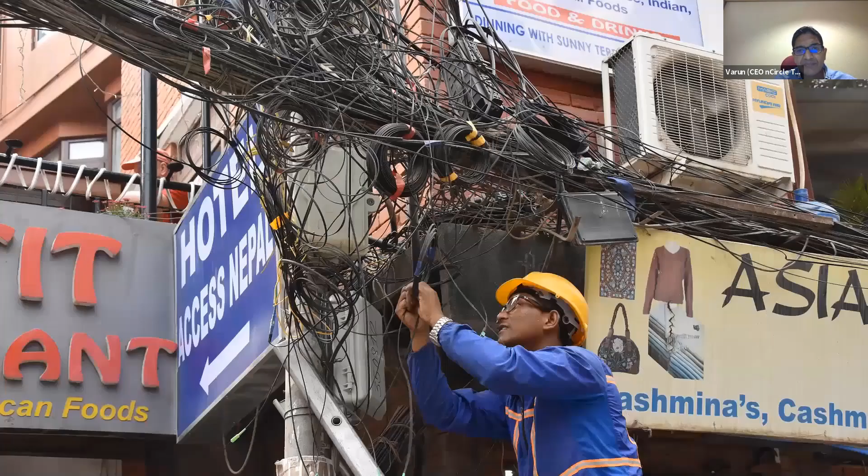The last is probably that you sometimes try to add new features into a very complex or non-maintainable system. After a few years, we may see many systems where teams look like this, trying to add one additional feature into an already overloaded system. So you need to choose the technology that already supports many features that you need, and you really need to keep the system very, very clean for future development.

So if there are all these problems, what is the best practice to evaluate and adopt the 3D technology in the right way? Next slide, please. Let's look at some best practices. And the first, as Simon Sinek said, start with why.

Define why are we building the 3D application and how are users going to use it. I categorize the purpose in the following few buckets. Basic, a viewer primarily focused on viewer technology. It could be a basic viewer or an advanced viewer.

Second bucket is review and very data-heavy operations. Third one is about configurators of various kinds. And fourth is probably editors. We'll be talking about each of them in detail in coming slides.

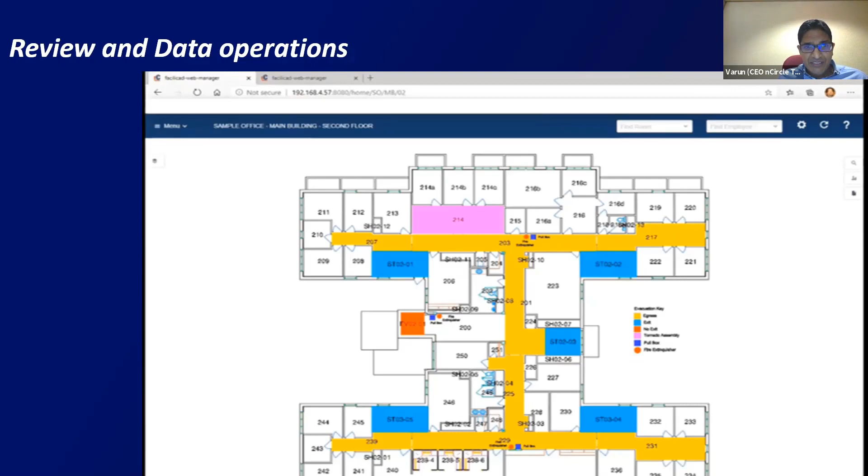So let's look at what are the important characteristics of such platforms. These platforms do not need to edit the geometry, but they do a lot with the 3D models. For example, users want to do measurements of various kinds, overlay data from sensors or facility management data, create RFIs linked to specific entities, comment history associated with the components. High accuracy of data is required because a lot of engineering decisions are being made based on the collaboration on the cloud platform.

Input output format can be regulated in some cases. In some cases, users might push you to support many file formats. If you are driving the process in-house, you do have some control on regulating the process, the formats.

Since such platforms are focused on specific workflows, a very high quality 3D visualization may not be critical. The only exception to that is if you are focused on C-level executives and review by C-level executives; real-time rendering with high quality can provide a lot of benefits. We've seen some examples of this kind of thing being developed, probably like Unity Reflect or so.

Business model wise, the most preferred business model for users is per user pricing with no limit on number of files. And this could be one of the very important factors in 3D technology selection in such cases. We'll come to the details of that in a few slides below. One last point to cover here is that security of the data is also very critical in such cases, because large organizations are putting their very confidential data on the cloud.

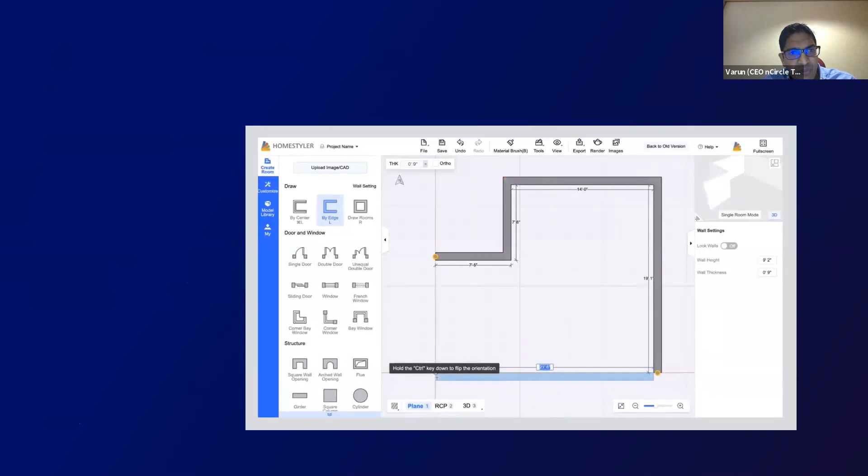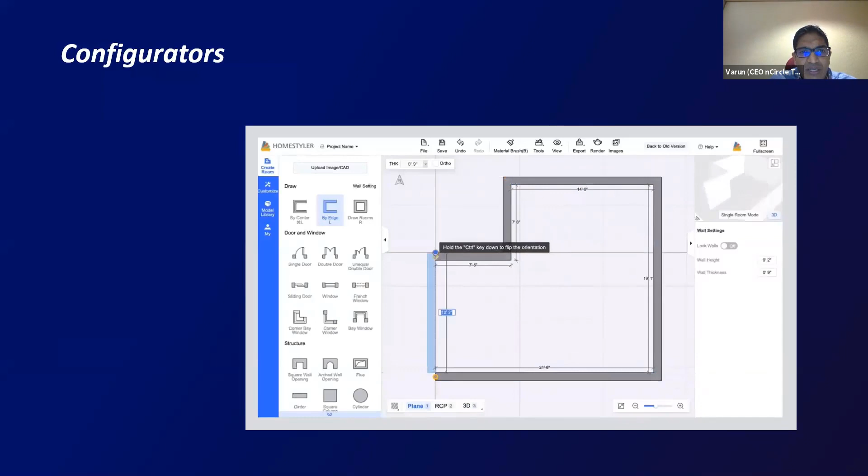Next category of viewers is configurators. As you can see from the image, a basic example is a home design and interior layout configurator. You could have a tile configurator, floor plan layout configurator, BIM objects configurator, basically configurators of various kinds. What are some typical characteristics of such platforms? These platforms need to provide users with lots of templates and then allow users to customize various parameters of the design. It needs to update geometry and visualization quickly.

Customization parameters could be only visual parameters or even geometry parameters as well. And when considering geometry editing, we need to evaluate if the editing of the geometry is better in a 2D environment or more efficient in a 3D environment. For example, if you're building a home configurator, editing the layout in 2D is convenient, and finally a 3D visualization is required for better experience.

Visual quality, I believe, is important if it is end user centric. For example, if you're focused on home layout and furniture, good quality visualization will definitely increase the chances of purchase. For some other components, the visual quality could be secondary.

So finally, one more aspect to cover here is that after the design is complete, we need to evaluate how the design will flow downstream, and hence the output format is critical. So in the example we've been discussing, after the user has configured something, you may want to output it into an industry standard format like IFC. So your output needs to be supported. The 3D viewer technology should support such formats downstream.

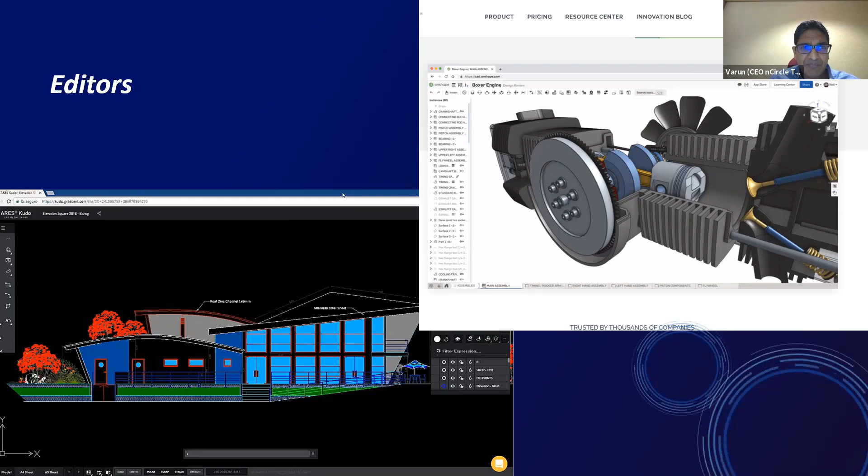And the last interesting category of viewers is editors. I mean, the 3D technologies are editors of different kinds. Plant process design, you could want to edit properties of files online, or even direct editing of layouts in the cloud. Here are some examples I think a lot of you know about: OnShape, there is Kudo, and a few others. So let's look at typical characteristics of some of them.

Since everyone is working remotely, these platforms provide capability to create and edit files online. A lot of you must have heard about OnShape. You can practically do everything that you can do in desktop CAD. ARES Kudo and AutoCAD Web offer you capability to edit DWG files online. Such engines do need to have a very good geometry kernel running in the background. People need to be able to work with many controls and commands to do things on the cloud similar to what they do on desktop applications.

Typically, some of them do need to support input output in specific formats so that when people complete their designs in the cloud, other collaborators can still work with the design in traditional desktop applications. Some of these platforms can even add a lot of value with co-editing like Google Docs. Multiple people can work on the same design simultaneously. Visualization quality is not of the highest importance for such platforms, but it is one of the good features to have.

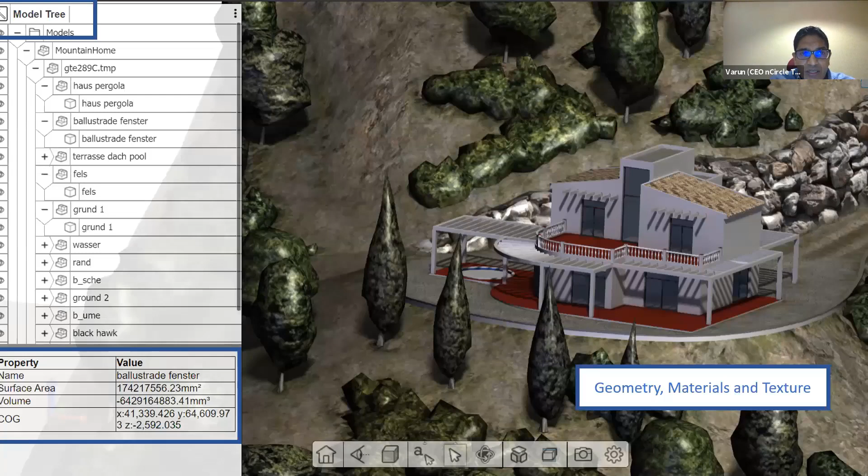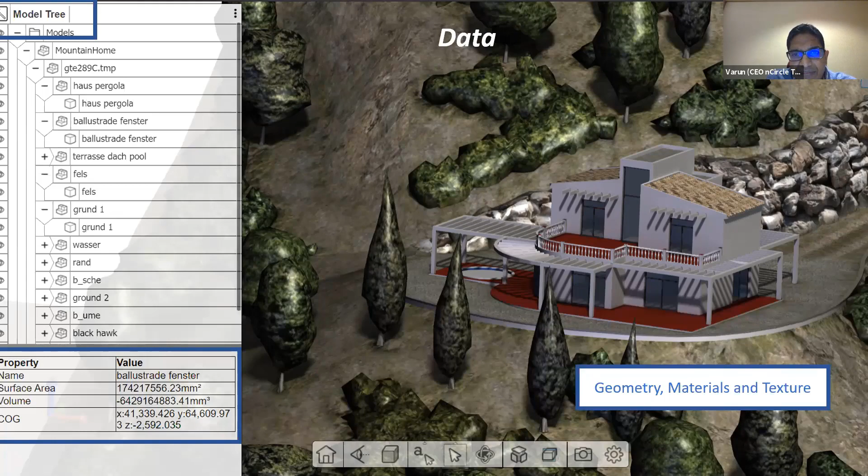So now that we have looked at different buckets and types of viewers, let's look at some of the parameters that we have identified for each of them in depth. So the first one is about data: data about model tree, geometry, properties of elements, materials, and textures. But to understand which 3D technology is best at providing accurate data, you need to understand what is the conversion technology behind. Let me start with the pipeline first.

Let's look at how the entire 3D viewing in the browser is happening and the pipeline. You have native file formats and you have a converter. Some of these companies provide you the converter on prem, or sometimes they are hosted on their own servers. And then once this native file format is passed through the converter, it creates a browser viewable file format.

And finally, these files are loaded in 3D viewer. This conversion of file format to browser viewable file format does not guarantee 100% data conversion, although most of them do a good job at it. Each of the different file formats has a different converter: IFC converter, Revit converters, and so on. The details we need to understand is that each converter is at a different stage of maturity and accuracy. The fine print in most cases is also if it is completely supported or partially supported.

Most of them support geometry, but you need to ask if it supports tessellated geometry, parametric or BREP geometry or not. Does the viewable format capture parametric information and entities? Are the materials supported? Some do, some do not. So like this, there are many things to evaluate from the adoption standpoint: geometry, metadata, model trees, even views, colors, textures, properties of elements, and probably even GUID, so that you can work a lot with such information.

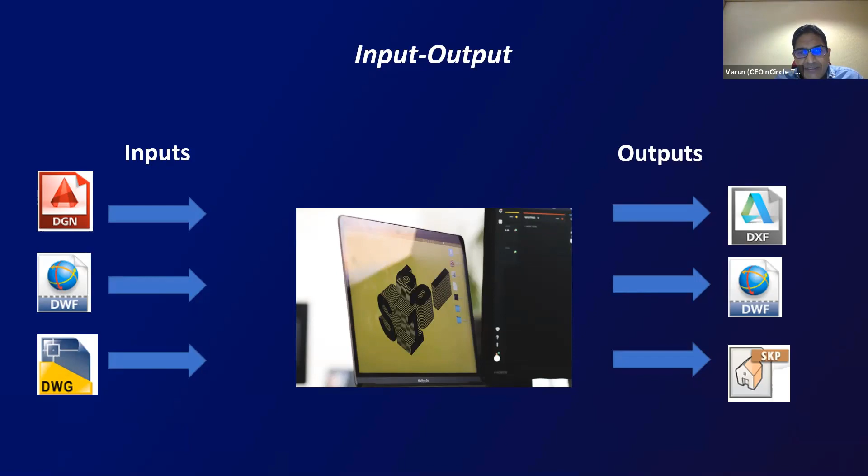You should also check how much would be the time lag when a new version of the file format is released. How long does it take for the conversion technology provider to catch up with the new file format? For example, if you're using Autodesk technologies, then Autodesk Revit file formats and the latest version might get supported faster as compared to few others. So all these affect your choice of technology selection at every point of time. The next that we talk about is performance.

Performance is very difficult to estimate at the start. However, one thing that I would like to mention is that many companies develop a 3D viewer on top of plain WebGL open source components, but then spend a lot of time to improve the performance. This happens mainly with in-house developed viewers.

In the long run, if you compare the cost of such development with the cost of licensing a technology and the opportunity cost of getting to market faster or later, you will realize that you are better off licensing a technology rather than building one your own.

There are few successful implementations when you start in-house, when the 3D viewers are not dealing with large files; they're more focused on configurators, because you can control the configurations and pre-estimate the configuration parameters required. So in such cases, maybe working with such technologies could be a good choice.

There are various kinds of performance optimization that need to be built to make it a high performance 3D viewer: progressive loading, geometry buffering, different kinds of clipping. When you pay a good license fee, effectively you are paying for such features which are developed and stabilized over a long period of time.

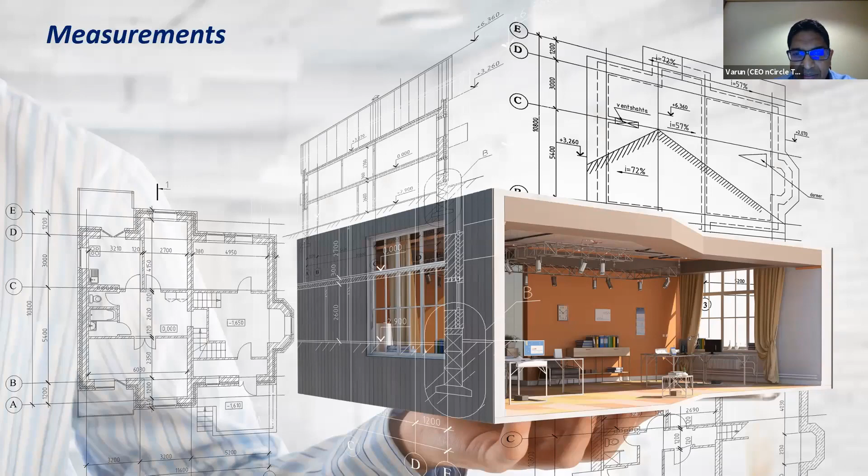The next one that I want to talk about is related to measurements. If you're going to do any measurements, accuracy of measurements is very important. It is important to check if the viewer loads measurable entities like edges, segments, points, and vertices apart from the tessellated geometry. This helps you in snapping of points closer to the entities and making accurate measurements. Measurements are not accurate on tessellated geometry, but could be much more accurate on measurable entities.

Next one is about visualization. If visualization quality is of prime importance, apart from out-of-the-box support for various visualization settings, it is important to check if the 3D technology provides you access to shaders or not.

To get some of these great visualizations, you may need to overload with a lot of shaders. And if you do not have access to be able to implement your own shaders, it could become difficult to get better visualization.

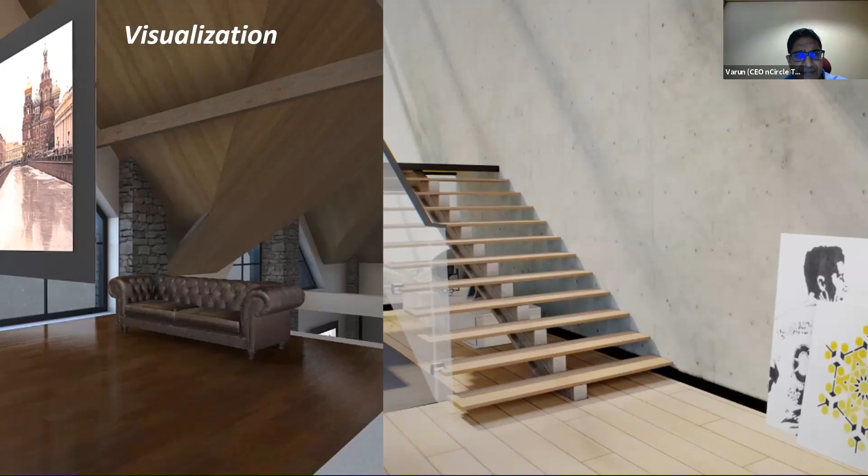Next one we want to talk about is security. For any cloud application, basic security checks are absolutely necessary, and you should prepare your system for the OWASP top 10 security risks. OWASP is the Open Web Application Security Project. They list down various high risk or important security checks that need to be performed. However, let's look at some of these and how they are critical for your choice of 3D technology.

If you remember the pipeline of the converter that I showed some time back, native file format, a converter, and then browser viewable file format, it is important to understand where each of these components is located. Some viewing and conversion technology companies provide you the converter and viewers to be hosted on your platform, while some viewing technology providers have the converters hosted on their own server. When they are hosted on their own server, the data is, at least for the process of conversion, going to their servers, and then you get back the converted file.

Practically, I'm of the opinion that cloud is secure, and every company is implementing all the necessary protocols to make it as secure as possible. But sometimes it still becomes a pressing point with your customers that my data is going to a third-party server, which I have no control on. So with some customers, you might be able to get away by ensuring that after the conversion, with certain additional implementation, the content is deleted from the conversion server.